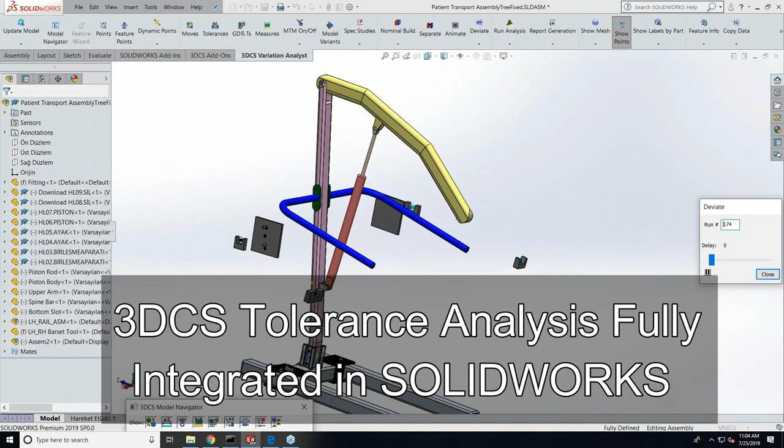Yes, now we have 3DCS integrated with SolidWorks. We come in as an add-on workbench with two tabs. One is the 3DCS Variation Analyst Home tab, which covers all the basic functions like feature creation, model creation, analysis, and the reporting tool. And then we have a 3DCS add-on tab where we have the mechanical, compliant, and AAO functions.

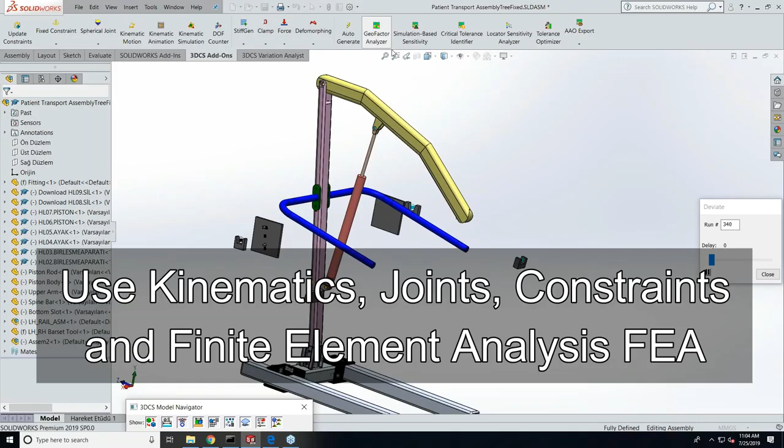So now we have a 3DCS model navigator tree, which exactly resembles the SolidWorks tree here. The four main inputs to a tolerance analysis model are the CAD data, moves (how it goes together), tolerances (part variation), and measurements (what we want to measure).

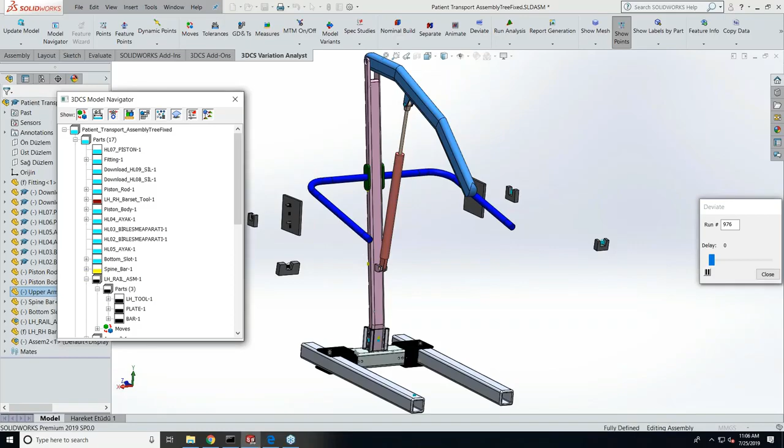So I got a patient lift model assembly here. You can see how the parts are deviating. That's because of the applied moves and tolerances that I have added to the model. So let me go ahead and show the measurement. Here I'm going to need to measure the angle between these two rods here.

The one main thing here is I've used a multi-stage assembling process which assembles this plate and rod to a fixture tool, which in turn assembles the whole sub-assembly into the top level assembly to the spine rod. So let me animate through. You can see how the plate goes into the fixture tool first, followed by the rod. This happens on the right side.

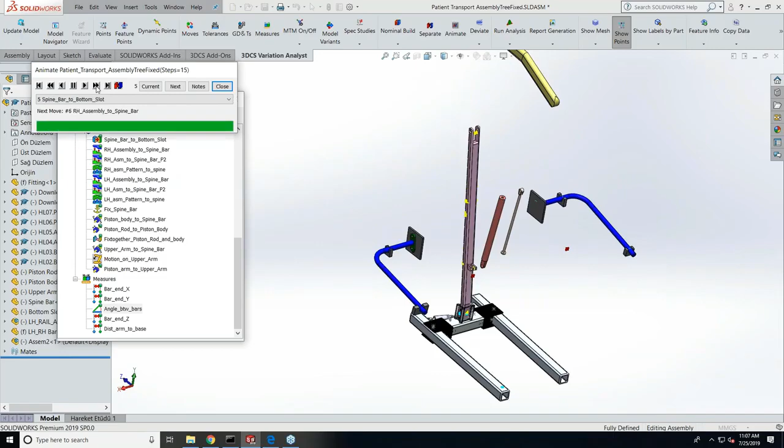So now that's the sub-assembly move. Now I'm going to assemble this whole sub-assembly into the spine rod. So first thing is placing the spine rod in position and then bringing in the rod there. And we have a pattern move here at this stage which aligns the whole pairs of the plate and this spine rod.

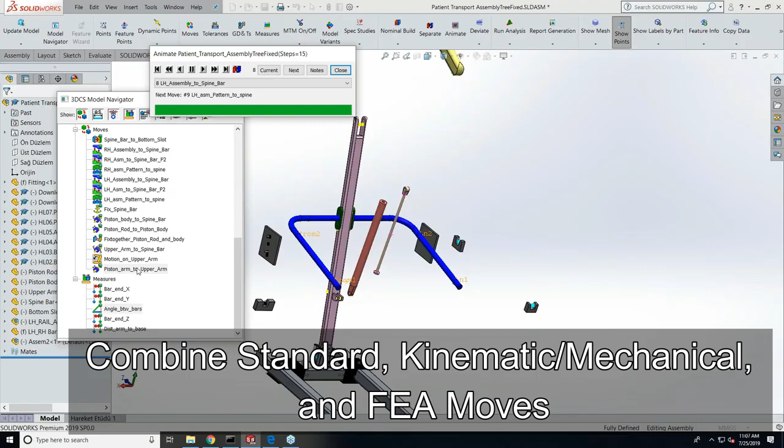And when you look into the move list, for an example, I've used a combination of both analyst and mechanical moves so that I can cover both and show you a model can be built with any combination. So the other set of moves which assembles the rest of the parts would be all mechanical.

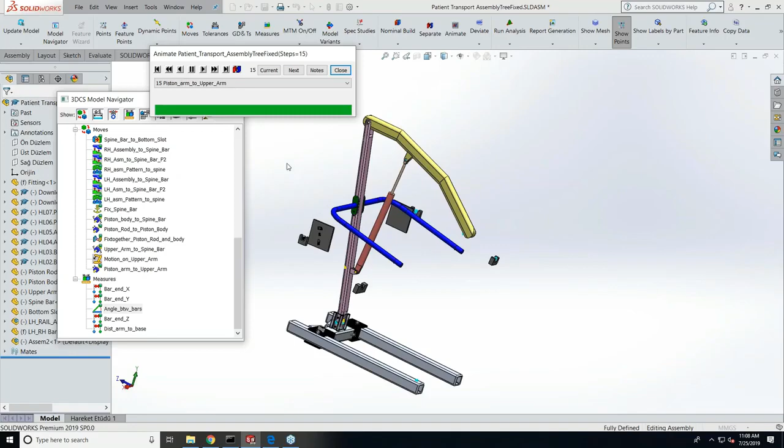So I'm fixing the spine bar, putting in the piston rod, the bar, then goes the arm, and finally that's attaching. And also the main purpose of having the mechanical move here: this upper rod is free to rotate up and down, and that's a motion. So that's why I've used a mechanical move combination in it.

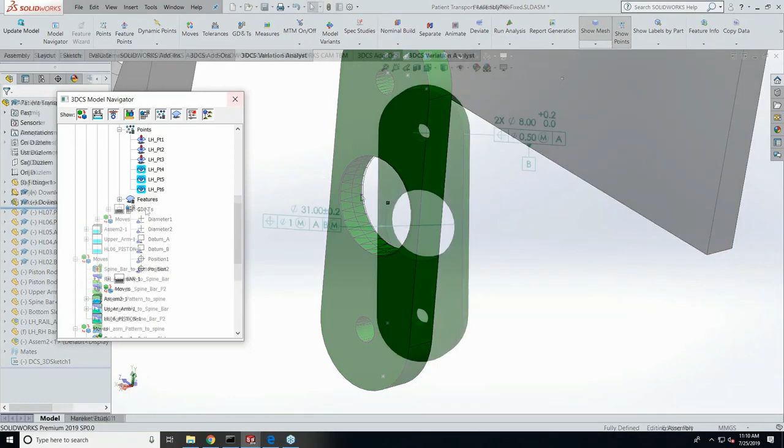So that's the GD&T. And this GD&T can be created in two ways. One, it can be done inside 3DCS using our GD&T function, or if this part already has embedded GD&T information that was created inside SolidWorks, we can pull that inside 3DCS. So this GD&T was created using MBD dimension here. I've used these functions to create the GD&T on this part. So you can see these parts have the tied up GD&T.

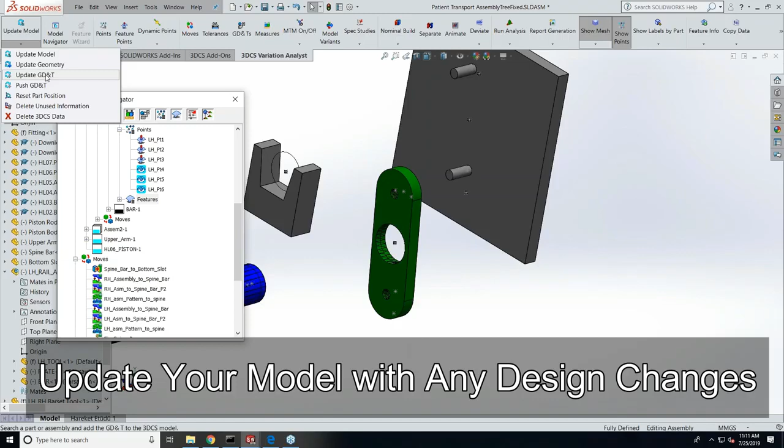Now coming back to the assembly, I'm just going to show you the function under update model, which is called update GD&T. So just by clicking this and selecting the part from which you want to extract the GD&T, it pulls up all that and gives you a message: okay, these many GD&Ts were extracted from that part.

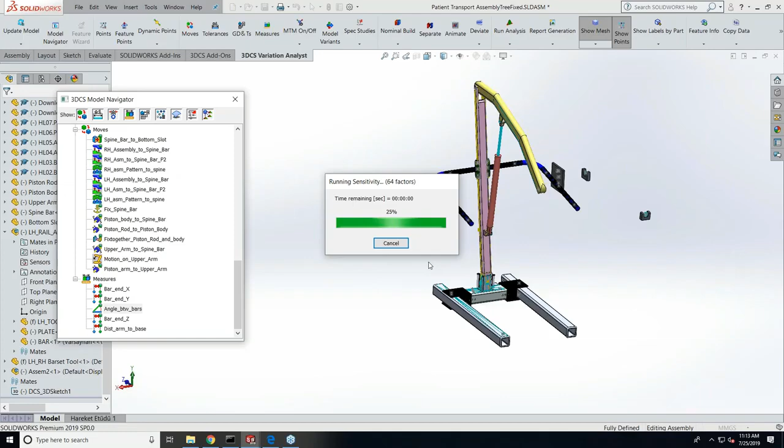So at this point, you don't see any deviations on the screen. The computer is applying tolerances internally to the piece parts, building it, checking that measurement, and then it's collecting that data 1,000 times in one go. So the benefit of having the table view here is you can see all the measurement results in one single display page. So the angle between the bars is the measurement that we're gonna check here.

And if you want to see the graph view of this measurement, you can just simply double click and that will pull up the graph view for that measurement. And this result is telling you the nominal angle, the min and max angle, the range of the angle variation, and the causes of variation at the bottom.

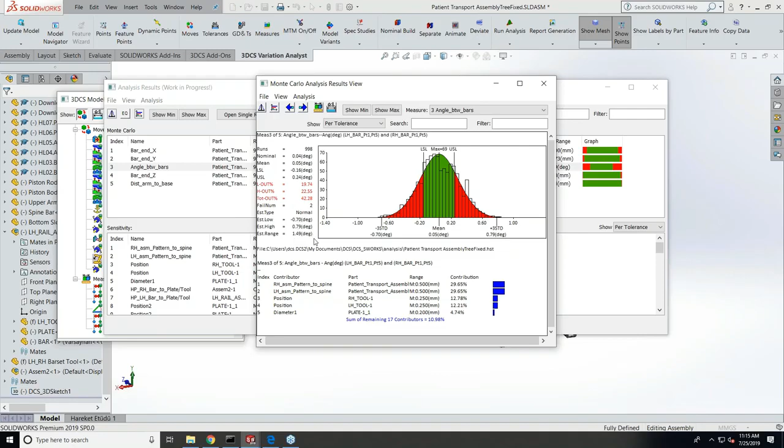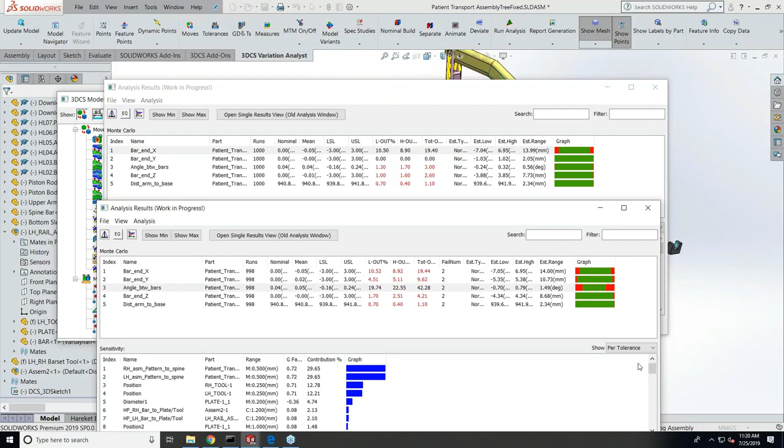I only made changes to the move pattern, but there's no changes in the part level tolerances. So I'm using the same tolerance in the model. And once the results are up, we can compare the results between process 1 and process 2, and see which process is most suitable. So this is an example of how you can improve your process by adding tooling. Of course, that's a capital investment, and it may increase the assembly time.

So it's going through a range of motion plus tolerances. It's hard to see because of the motion, but there's going to be a variation on that with the motion.

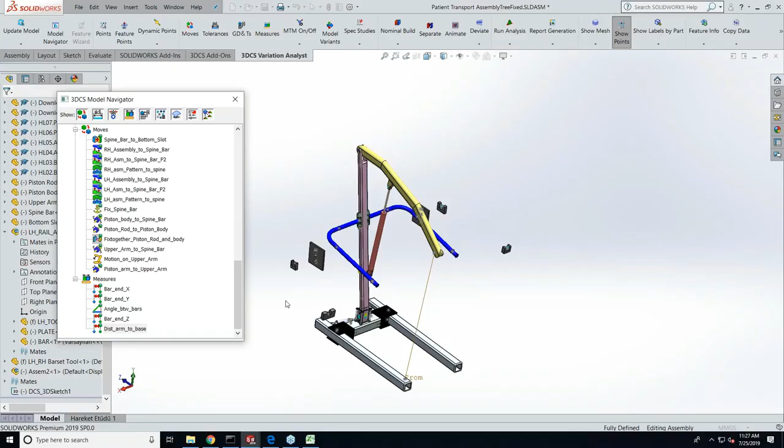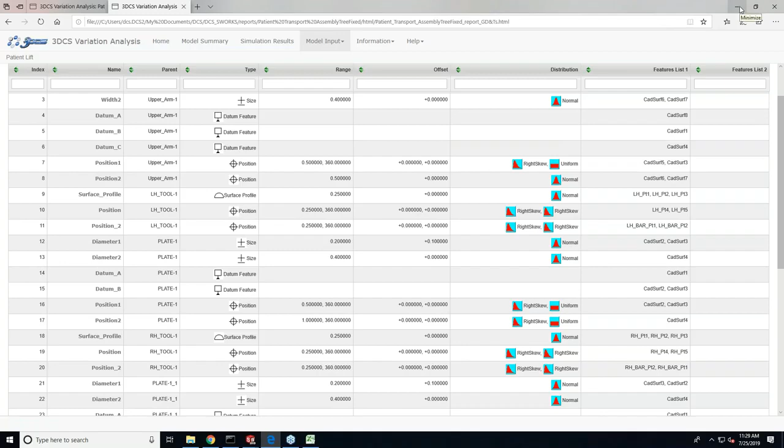So now that we went through these processes, we created tolerances, we added moves, we took the results. So now we have all the information in the model that we wanted. The next step is to take a final report for all this information. This is how the report looks. So basically, once this model is done, with a push of a button, you can get a report that can document everything that's in the model, as well as the results, the measurements that you were wanting.